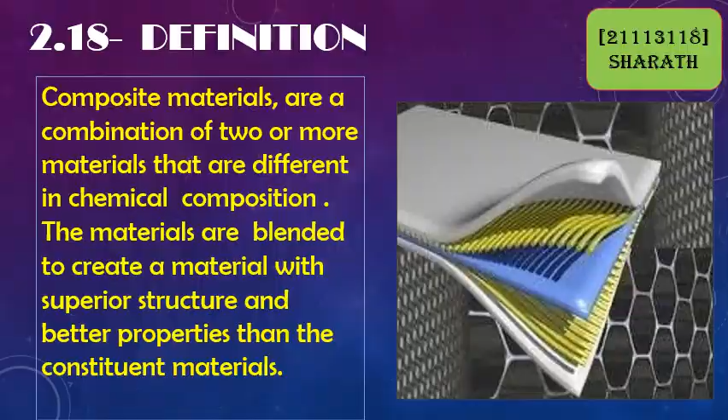Composite materials are a combination of two or more materials that are different in chemical composition. The materials are blended to create a material with superior structure and better properties than the constituent materials. Composite materials can be a combination of various materials such as plastics, metals, fibers, or ceramics.

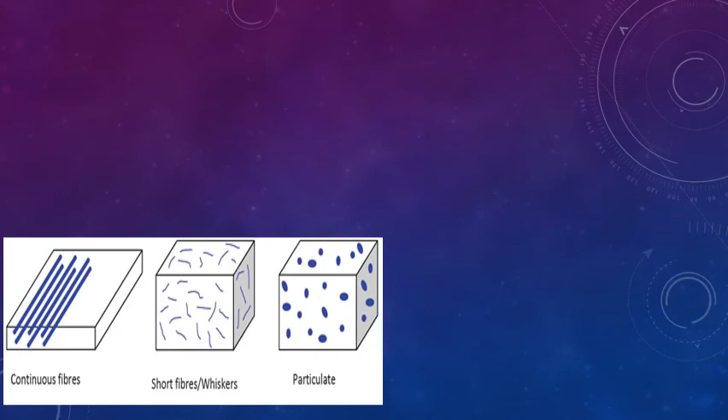The properties of composite material depend on the property, structure, and proportion of the constituent materials. Composite usually consists of two parts: the matrix and the reinforcements. The matrix holds the reinforcements, transfers the load to them, and protects them from mechanical and environmental damage.

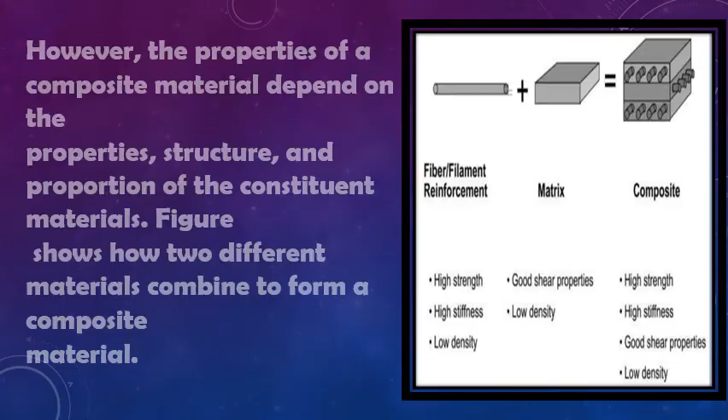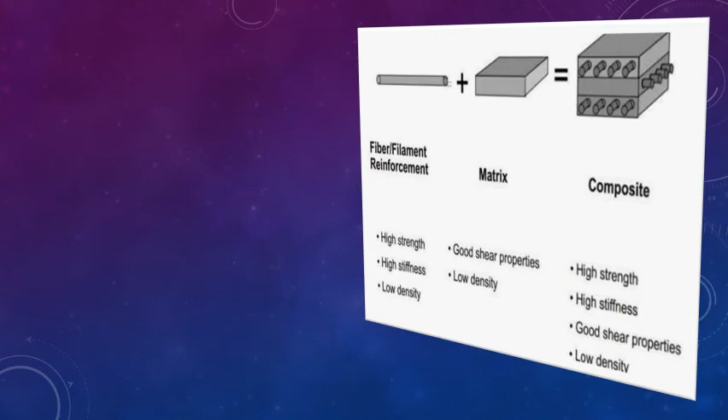Reinforcements carry most of the load and provide stiffness. Some composite materials exhibit better properties than the constituent materials, such as metals or plastics. Therefore, composite materials are preferred over these materials in applications such as aircraft, manufacturing, space vehicles, electronics, and sporting goods.

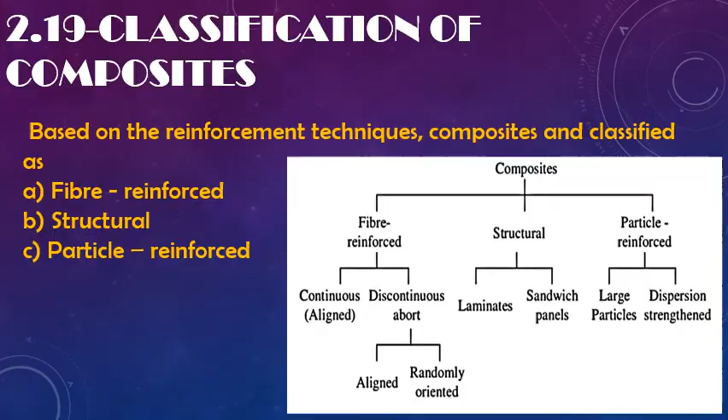Classification of composites. Based on the reinforcement techniques, composites are classified as fiber reinforced, structural, and particle reinforced.

Fiber reinforced composites consist of thin fibers of material which are suspended in the matrix of another material. The matrix is nothing but a substance in which the fibers are suspended. The role of the matrix is that it distributes the stress across the fibers and provides an overall toughness to the structure.

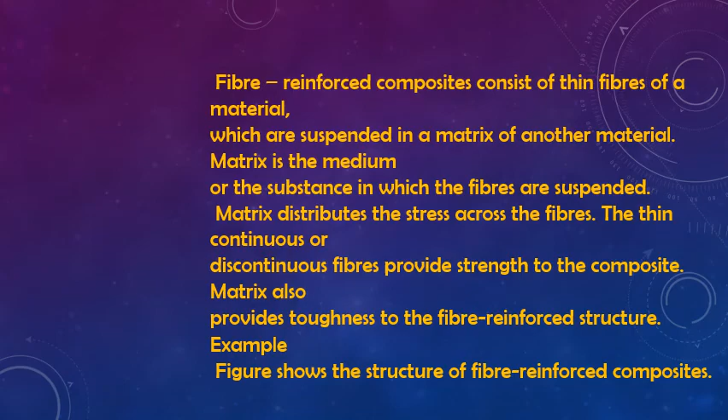One of the most common examples of natural fiber reinforced composite is bamboo, where the cellulose fibers are suspended in the matrix of lignin. Some commonly used reinforcing fibers are Kevlar, graphite, and glass.

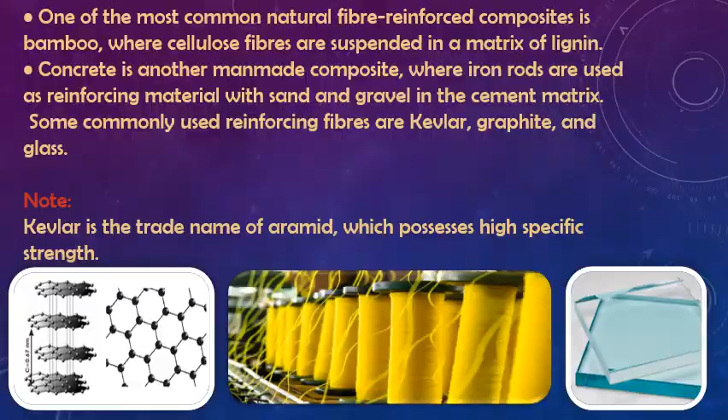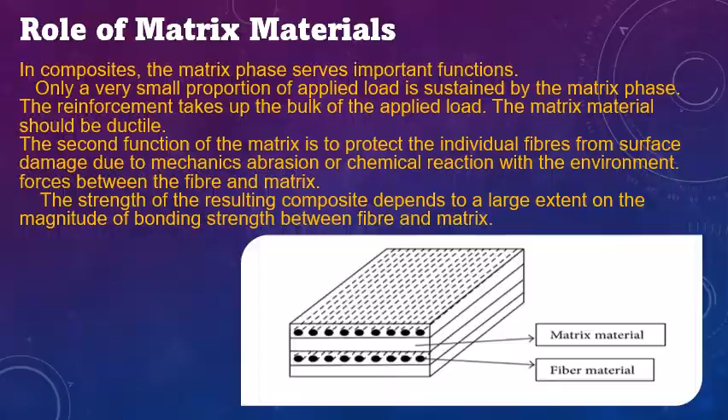Role of matrix materials. In composites, the matrix phase serves important functions. First, it binds the reinforcements together and transmits and distributes the external loads to the fiber. The second function of the matrix is to protect the individual fibers from surface damage due to chemical reactions with the environment and due to mechanical abrasion. Finally, the matrix separates the fibers.

Reinforced material composites. Composites are of three different types: particles, fibers, and structurals. Particles are of two types: large particles and dispersion strengthened. Fibers are of two types: continuous fibers and discontinuous fibers. Discontinuous fibers are divided into aligned and randomly oriented. Structurals are classified into two types: laminates and sandwich.

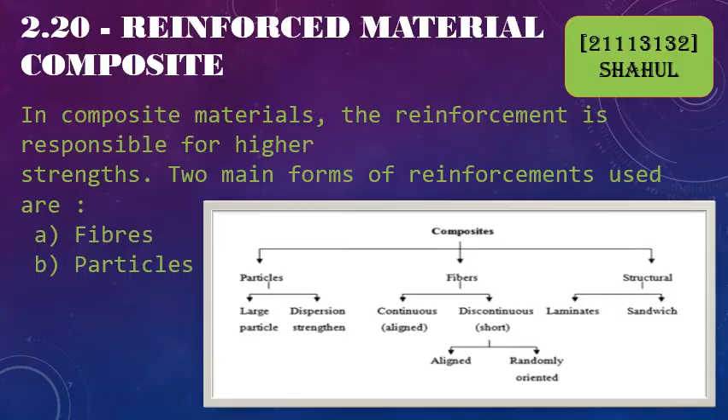Composites are materials in which the reinforcement is responsible for higher strength. Two main forms of reinforcement used are fibers and particles.

Based on the diameter and character, fibers are classified as follows: the fibers are either polycrystalline or amorphous material having small diameters. Fiber materials are generally either polymers or ceramics. Some common fibers used are polymer, ceramics, glass, carbon, boron, aluminum oxide, silicon carbide, etc.

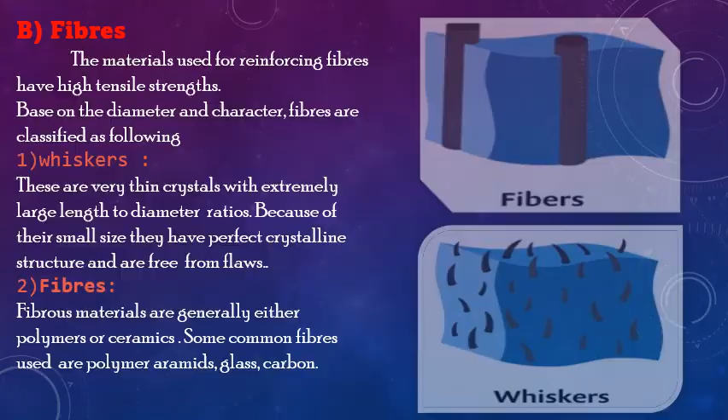Particles. The particles having size of up to 1 micrometer or more, in concentration of 20 to 40%, have been used in composites. Several metal particles such as tungsten, chromium, molybdenum, etc. can be suspended in a ductile matrix. Non-metallic particles such as ceramic can be suspended in a metal matrix. Several metal oxides and carbides in the form of particles are used to produce metal matrix composites, MMCs.

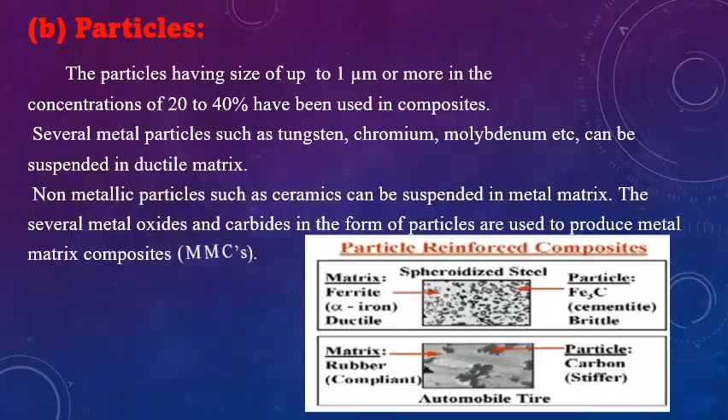Wires. Wires have a relatively large diameter compared to fibers. Typical materials include steel, molybdenum, and tungsten. The arrangement or orientation of the fiber, concentration, and distribution all have significant influence on the strength of the composites. The types of orientation of fibers are shown in the figure.

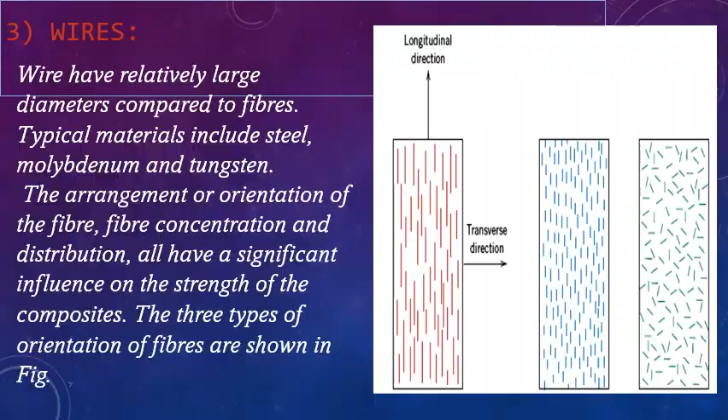So now let's look at the different types of composites. Based on the matrix material, there are three different types of composites: polymer matrix composites, metal matrix composites, and ceramic matrix composites.

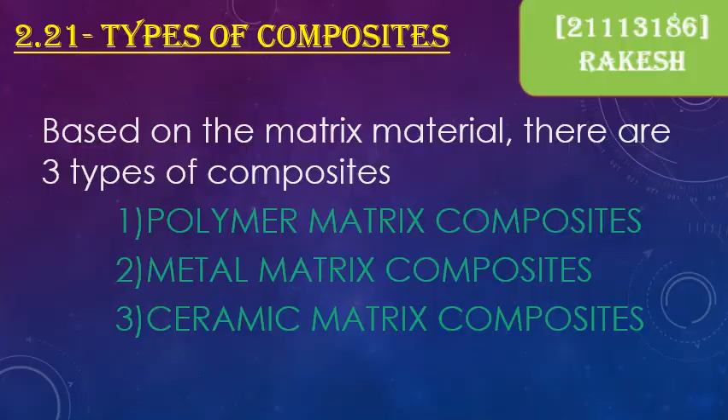Polymer matrix composite: the matrix material is a polymer reinforced by ceramic. The polymer here may be an unsaturated polyester and epoxy or thermoplastics. The properties of polymer matrix composite are high tensile strength, high stiffness, corrosion resistance, and high fracture toughness.

Applications of PMCs: it is used as a component in varieties of medical devices such as MRI scanners, CT scanners, wheelchairs, and prosthetics. Reinforcements are glass, quartz fiber, and Kevlar.

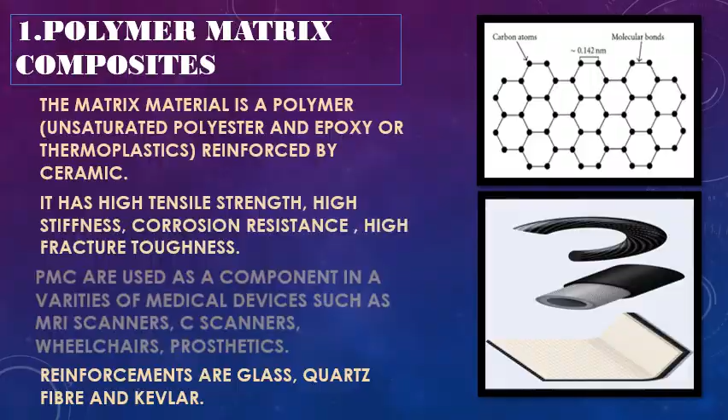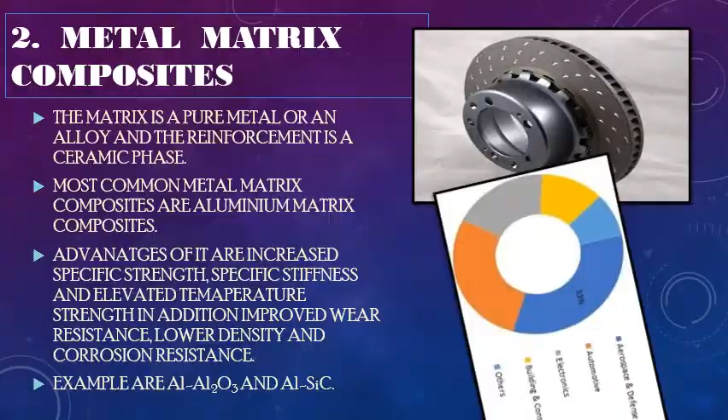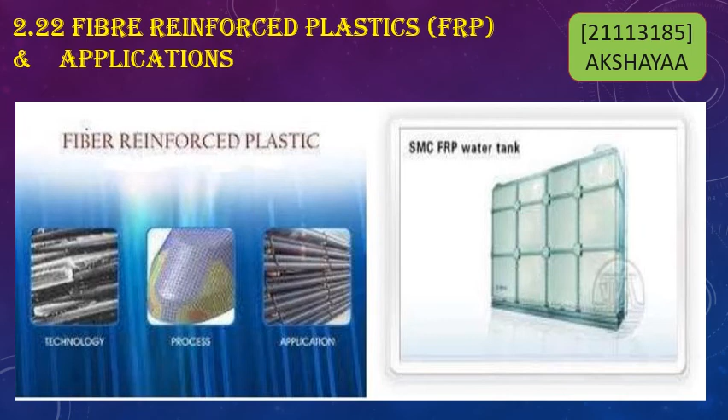Now, what is fiber reinforced plastics? These are plastics as a composite material made of a polymer matrix reinforced with fibers. There are many fibers: glass, carbon, aramid, asbestos, and wood. But the most common three types are glass fiber reinforced plastics, aramid fiber, and carbon fiber reinforced plastics.

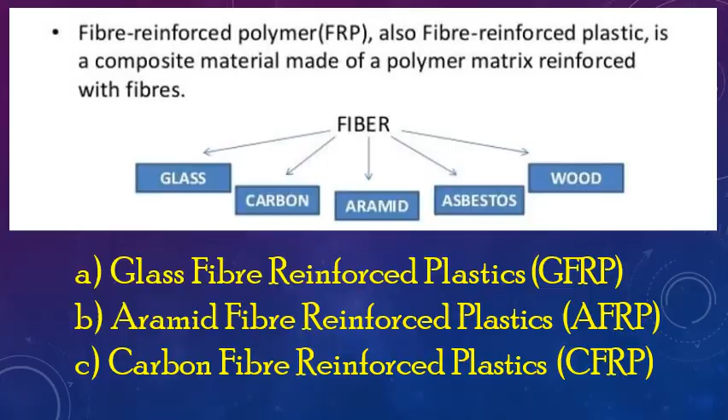Now, first, what is glass fiber reinforced plastics? GFRP are the most widely used and the least expensive of all the fibers. High purity silica fibers in polyamide resins are used for applications where the temperature is as high as 300 degrees Celsius. GFRP composites have very high specific strength.

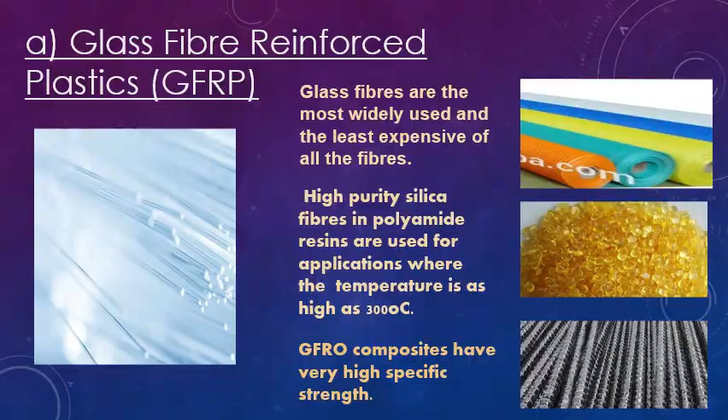Next, the common type is aramid fiber reinforced plastics. Aramid fibers are notable for being lightweight with high tensile strength. Kevlar 49 is the most common aramid fiber. The common matrix materials are epoxies and polyesters.

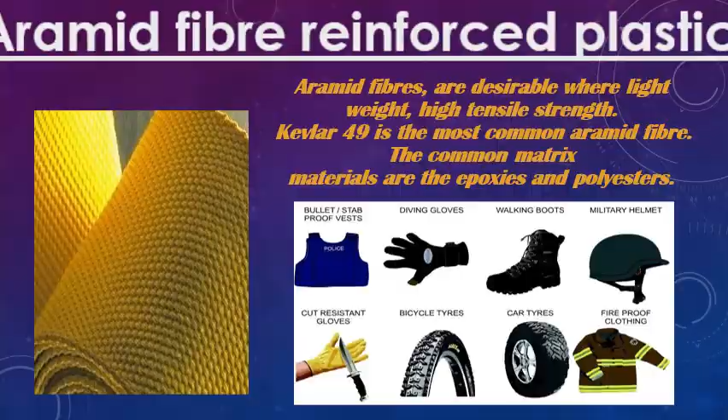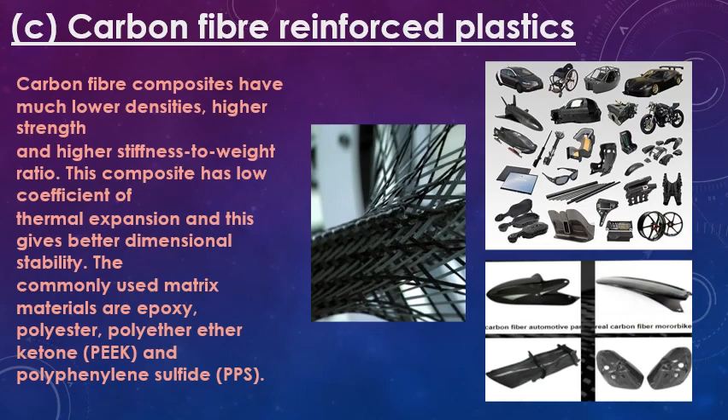Next, the last common type is carbon fiber reinforced plastics. Carbon fiber composites have much lower densities, higher strength, and higher stiffness to weight ratio. This composite has low coefficient of thermal expansion, which gives better dimensional stability. The commonly used matrix materials are epoxy, polyester, polyether ether ketone (PEEK), and polyphenylene sulfide (PPS).

Last, the advantages and limitations of composites. What are the advantages? These composites offer not only high strength to weight ratio, but also exceptional properties such as high durability, stiffness, damping property, flexural strength, and resistance to corrosion, impact, and fire.

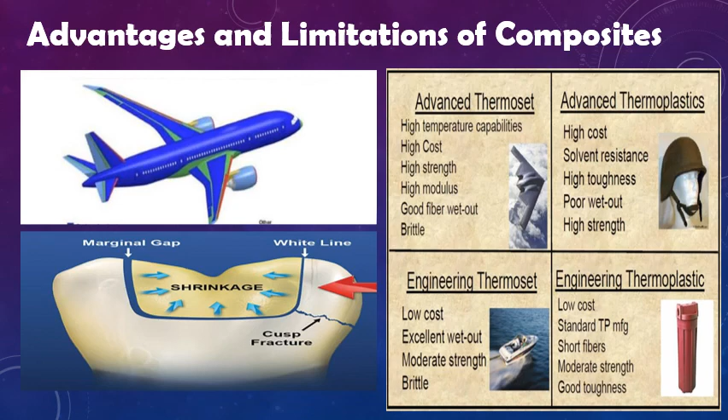What are the limitations, that is disadvantages, of composite materials? At high temperatures, the material strength decreases and deflection increases. These materials continue deflecting under heavy sustained loads, that is creeping. Impact loading during collisions can damage these materials.

Composite is a material made from two or more different materials that, when combined, are stronger than those individual materials by themselves. Simply put, composites are a combination of materials.

Coming to the applications of composites, we have several. Firstly, commercial aircraft: used for air conditioning ducts, radar dome, landing gear door sets, ceiling panels, propeller blades, air brake, portable water tank, etc.

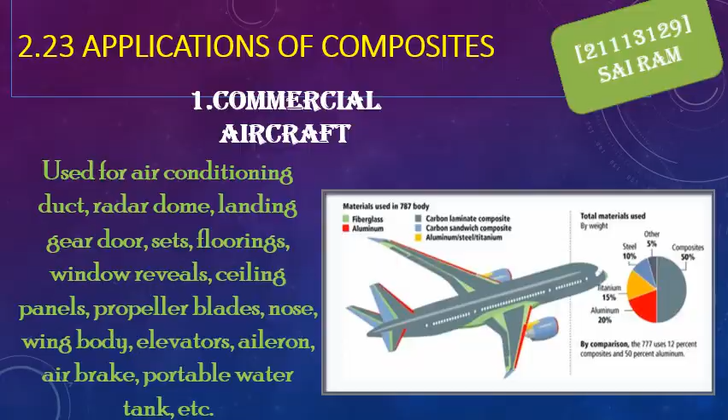Second application of composites is military aircraft, used for speed brake, rudder, forward fuselage, elevators, horizontal stabilizers, landing gear doors, etc.

Third application of composites is missiles, used for remote piloted vehicles, filament wound rocket motors, wings, motor cases, etc.